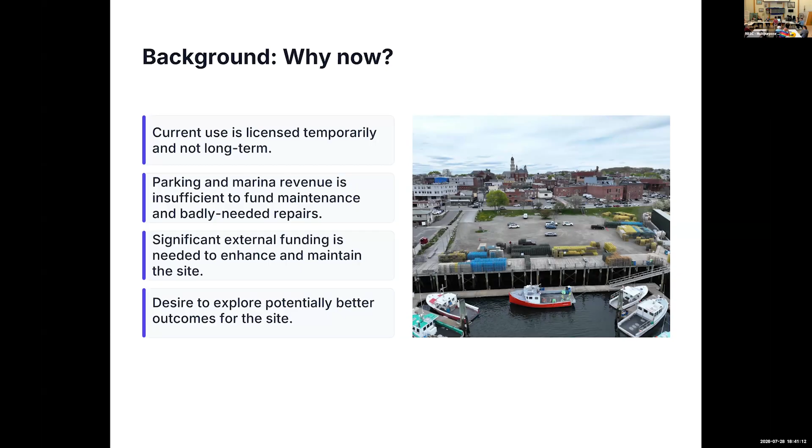So I'm going to update you on this refreshed visioning process and what we did. As many of you know, we received this technical assistance award from Mass Development, and we are partnered with Lori Zapalak, who's a consultant specializing in real estate, economic development, and maritime cities. She was a good fit for Gloucester. We had four main components of the work, and I'll provide a little bit more detail on each of them. First, we reviewed the site's history and especially previous visioning and development efforts.

Second, we wanted to clarify what was possible on the site, and this was largely in terms of the regulatory framework, so we looked at that in detail, and then we also considered other important contextual information, including the content of the technical studies I mentioned, looking at site conditions.

Thirdly, and this was the bulk of the work, we gathered community input through various channels. Earlier this month, we offered a public session reporting back on what we had heard. And then finally, we prepared for next steps.

Initially, the project was intended to produce a draft request for proposals document, but based on what we learned, we decided to do an intermediate step of an expression of interest process. So that's what we worked on.

So a little bit of background on the site. Based on its location in the heart of the harbor, it has a long history of being at the center of the commercial fishing industry and maritime trade.

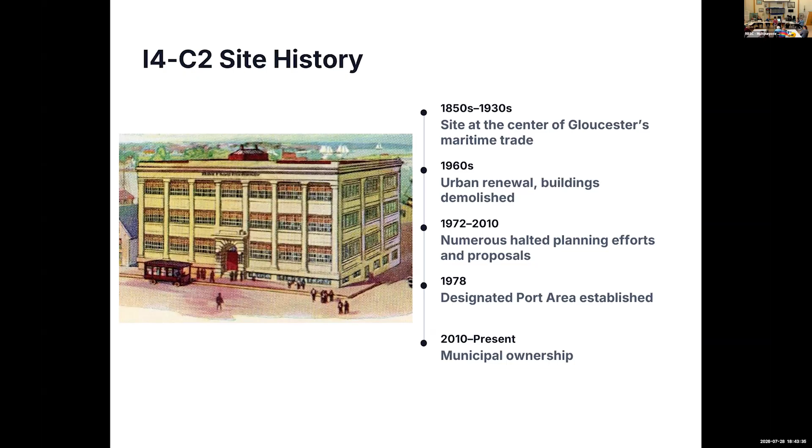And as I'm sure you know, in 2010, the city purchased this site with assistance from a Seaport Economic Council grant.

However, when the city subsequently launched an RFP, request for proposals process after that, they received no proposals in response.

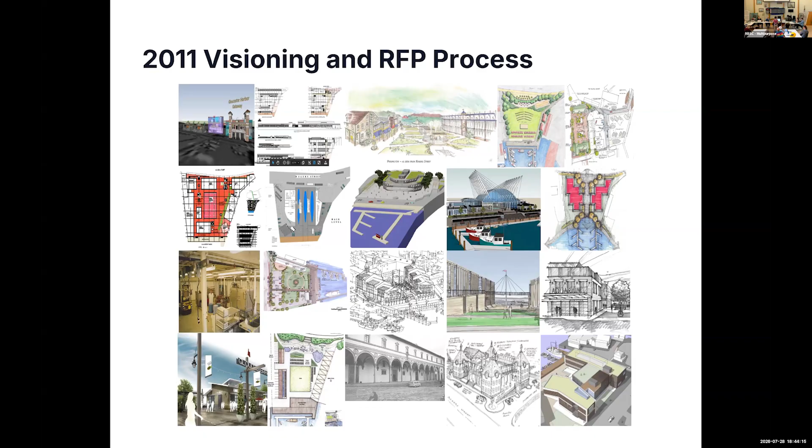So, a super light and incomplete primer on the DPA. Because this site is within the DPA, very strict regulations apply about how it can be used.

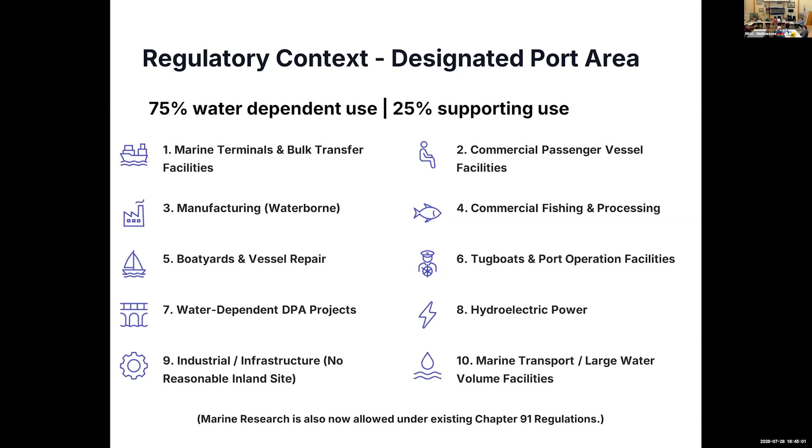And many of the concepts from the 2011 visioning process, though interesting, were not necessarily compliant with those regulations.

So with this most recent process, we wanted to gauge current public sentiment about the site because quite a bit of time has passed since that last round. But we also wanted to make sure and try to do a better job of grounding the input we received in the regulatory and financial realities of the site.

So we wanted to make sure people had an understanding of what could happen there before they flooded us with ideas. Our process ran for 3 months, from March through May.

So we did, I think, all the usual stuff. We created a web page with background information. We offered numerous ways to engage with the effort. So we had an online form. We had an on-site public engagement session.

We had 6 thematic focus groups that brought together people from different stakeholder groups relevant to the site, such as commercial fishing and seafood, commercial and community and neighborhood interests, and several others.

We made sure to speak to key stakeholders like waterfront property owners and site abutters. We also invited anyone else from the community who had strong feelings to contact us directly, and we met with quite a few of them.

And we advertised these through the usual channels, the city social media, the Gloucester Times, a project listserv that anyone could sign up for, and the webpage.

So we actually, although we had different types of input, we provided the same basic questions to everyone, and we prefaced everything with background information on the regulatory context.

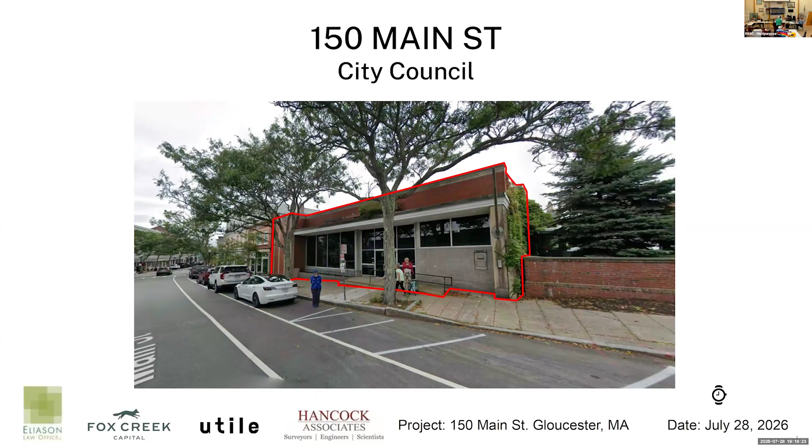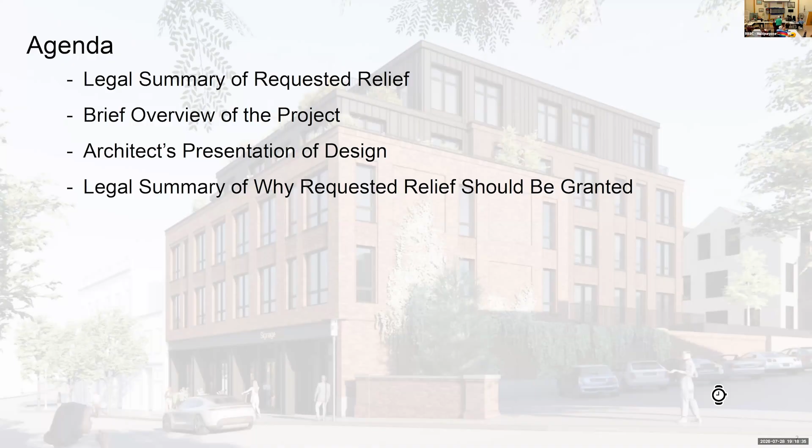The property is located at 150 Main Street, which is the former Santander Bank. Tonight, what we'd like to do is give you a legal summary of the requested relief, a brief overview of the project, the architect's presentation of the design, and a legal summary of why the requested relief should be granted. The applicant is converting the building presently permitted for a bank into a mixed residential and commercial space.

The bank has not been operational at this location for several years, leaving a hole in the fabric of both Main Street and Middle Street neighborhoods. The property sits in both the CB and the CCD district. The Main Street building is in CB, and the Middle Street building is in the CCD district. Also, approximately half of the lot, the Middle Street side, sits within the historic district. The Main Street portion does not.

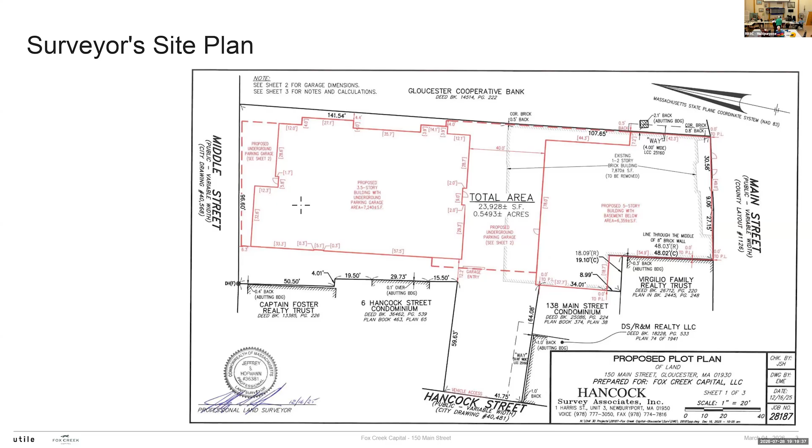As you may know, commercial uses in the CB and CCD zones have zero front, rear, and side yard setback requirements, and may be constructed lot line to lot line, and the bank was, in fact, constructed that way. Residential uses do have setbacks with a multiplier based on height, hence the need for variances from the ZBA for this project. The applicant has received all the relief it needs other than from the City Council.

On January 8th, 2026, the Zoning Board of Appeals voted unanimously to grant variances for lot width, front yard, side yard, portion of parking aisle width, and front yard vegetative cover on Main Street. Despite the complexities of this site, the project required only 5 variances. If this were a commercial site, none of the setback variances would have been required.

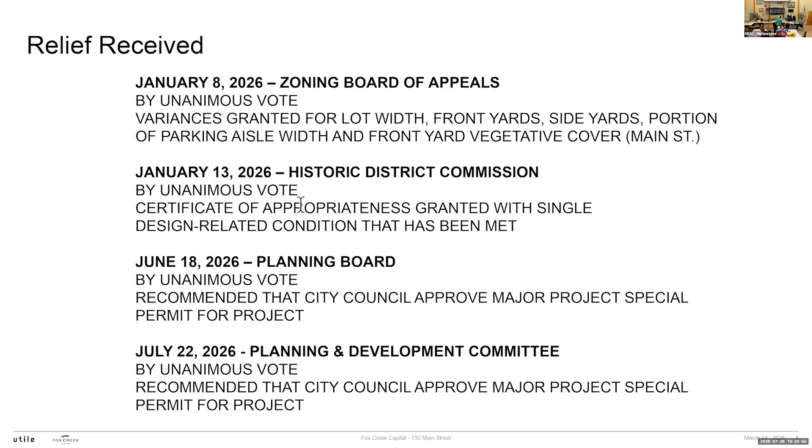On January 13th, the Historic District Commission voted unanimously to grant a certificate of appropriateness with one single design-related condition that has been met and incorporated into the plans filed with the City Council. On June 18th, the Planning Board, by unanimous vote, recommended that the City Council approve the major project special permit. And on July 22nd, 2026, the P&D Committee, by unanimous vote, recommended that the City Council approve the major project.

With the relief requested, there will be a special permit under GZO 2.3.1(8) for a multifamily with 40 units, special permit under GZO 5.7.1 for a major project with 61 bedrooms, special permit under 3.2.2 footnote A to reduce the lot area per dwelling and the open space per dwelling, and special permit under 3.1.6B for a building over 30 feet in height.

The project has been thoughtfully designed to fit into two distinct neighborhoods. It abuts both Main Street and Middle Street. Great consideration has been given to its residential and commercial abutters.

The applicant has reached out to the residential abutters, left a letter, given their contact information, met with several residential abutters to go over the plans and answer their questions. Also met with the Bank Gloucester representatives, which directly abuts the project, and other business owners along Main Street to explain the project. GMGI filed a letter of support with the city clerk.

Tom O'Grady of the Cut sent a letter of support to the councilors. Seti Robinson has also sent a letter of support on her own behalf and on behalf of Housing for All Gloucester. And the applicant spoke to the owners of Short and Main and received verbal support from them. The applicant intends to continue to maintain contact with both its residential and business neighbors throughout the process.

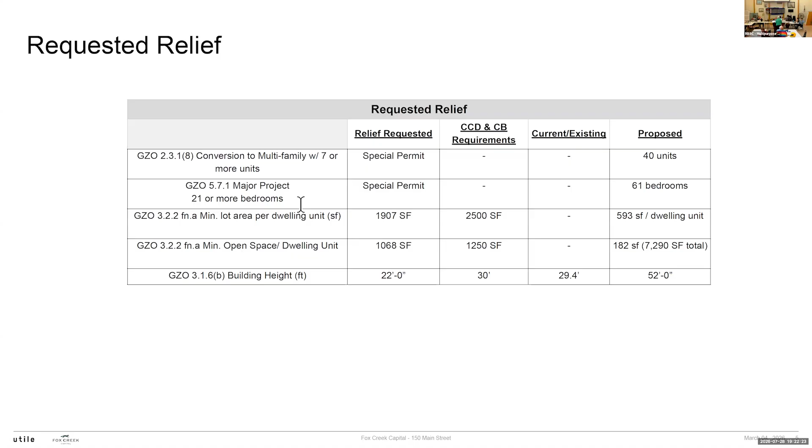And now I'd like to turn this over to Chris Boyce from Fox Creek to give you a general explanation of the project.

Thank you, Deb. Chris Boyce, 221 Woodside Ave of Winthrop. Good to see you all again this evening. I'm head of development for Fox Creek Capital.

And as hopefully you'll see tonight, designing with care, that really means that every decision we make focuses on creating a project that honors the community we're in. And that's what brought us to 150 Main Street. We started the design process with Utile over a year ago. And through the last 10 months, as Deb pointed out on her previous slide, we've gone through the public review process and had the opportunity to meet with neighbors, local business owners, city staff, Historic District Commission, the ZBA, the Planning Board, and many of you here on the council. We've been asked a lot of thoughtful questions from each of those groups throughout the process.

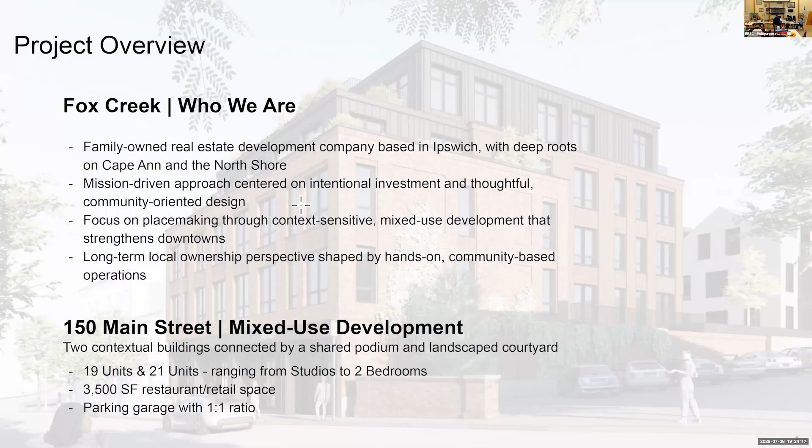This transforms an underutilized Main Street property into exactly the type of mixed-use housing that the city's comprehensive plan encourages. It adds year-round residents where infrastructure already exists. It strengthens downtown businesses. It reinforces the walkable character that makes Main Street special. Two thoughtfully scaled buildings with just 20 homes each may sound like a modest project, but together those 40 homes mean 40 new households living downtown.

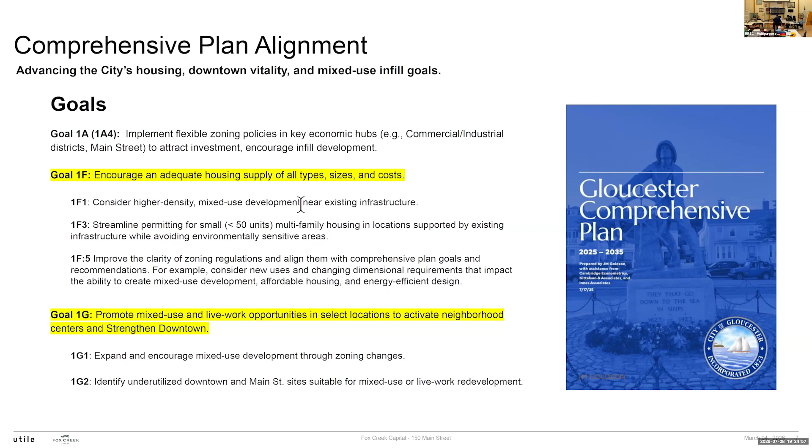Downtowns don't thrive just because of the buildings that occupy them. They thrive because people choose to live there. That's why housing is economic development. Those 40 households become new customers for Main Street businesses, new neighbors supporting local restaurants. They become more activity throughout the year from those year-round residents. They offer a stronger local tax base and more housing choices for people who want to call Gloucester home.

Of the 40 units, this project provides 10% inclusionary housing at 60% AMI. So it continues to offer new housing choices in Gloucester.

We've worked closely with Hancock Associates, Bowman Consulting, a large consulting team, and city staff to understand the project's overall impacts, utility impacts, but primarily transportation. Transportation is always a concern downtown, as is parking. This project provides all residential parking in an underground garage below the two buildings. The analysis from our parking and traffic study confirms this project fits comfortably into the capacity of the surrounding street network, while adding more people who can walk and support those local businesses.

Ultimately, this project is about taking a vacant site and creating something that contributes to Gloucester every day. Two buildings, twenty homes each, forty new homes in total—an underutilized site transformed into housing, ground floor retail, new investment, and a stronger Main Street. Those are the outcomes we anticipate this project will deliver.

But good projects are not just measured by what they contribute. As I stated earlier, they're also measured by how thoughtfully they're designed to fit into the fabric of their surroundings. With that, I want to turn it over to Michael LeBlanc from Utile, who'll show you how we worked to achieve those outcomes through thoughtful architecture, careful site planning, and a design that responds to the character of downtown Gloucester. Michael?

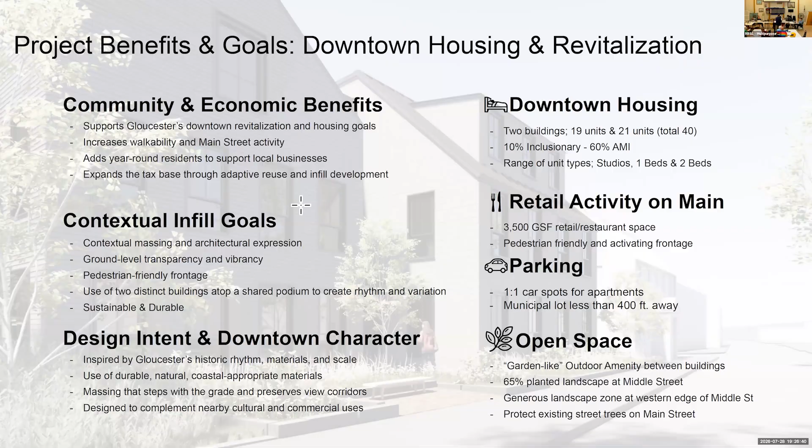Thank you, Chris. Michael LeBlanc of Utile Architecture and Planning. We are working with Fox Creek on the project, and hopefully you'll think the design we have here tonight is as thoughtful as Chris has been telling us it is.

So, starting with the existing conditions of the site. The current site is an underutilized lot with a vacant building and an unused parking lot, and in our opinion it's in need of infill development—all the benefits that come with that Chris just pointed out. To our east, we have the Gloucester Bank complex, which is actually a great neighbor for us. There's a laneway along the edge of our site, which gives a little breathing room for the project.

To our west is 75 Middle Street, 6 Hancock Street, and also the commercial buildings along Main Street. There's about 15 feet of grade change on the site between Main Street and Middle Street. This poses all kinds of challenges for us, but also gives us a great opportunity to tuck our parking underneath the building, as we'll talk more about as we go.

Because our site stretches all the way from Main Street— Five minutes, okay, we're gonna move then. Let's go quick. Thanks for the reminder. So we'll keep going here.

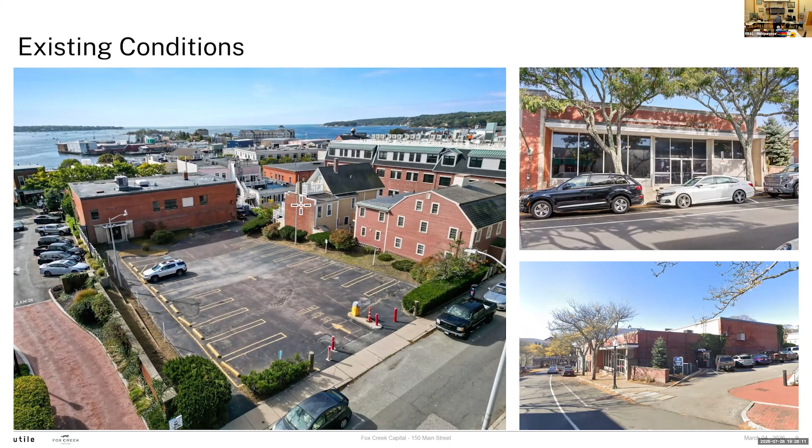So because we stretch from Main Street to Middle Street, we had to look at both contexts. We have the historic context of Middle Street. For us, there are many different scales, materials and types on Middle Street, but what we're most interested in is the residential scale, the materiality seen throughout the historic district, characterized by pitched roofs, wood clapboards, shingles, that sort of thing.

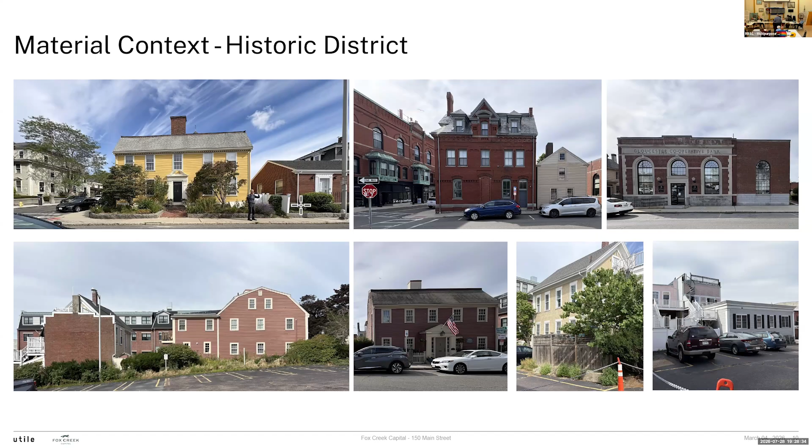Main Street is characterized by active ground floor uses built right up to the property lines, creating a well-defined pedestrian experience at the sidewalks. Over the storefronts, there are typically one or two, sometimes three additional stories that range in uses from commercial to residential. I would say that Main Street is the very definition of a pedestrian-friendly, active and vibrant street.

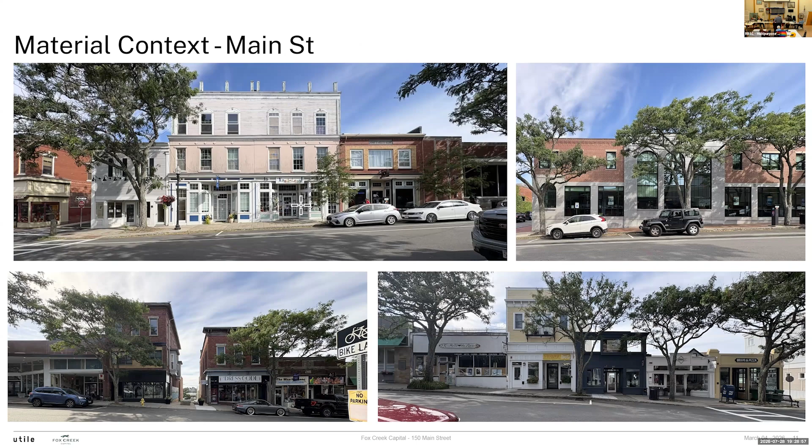We also looked at the uses along Main Street, and really what we recognize is that our project right now presents kind of a missing tooth in the vibrancy and activity of Main Street.

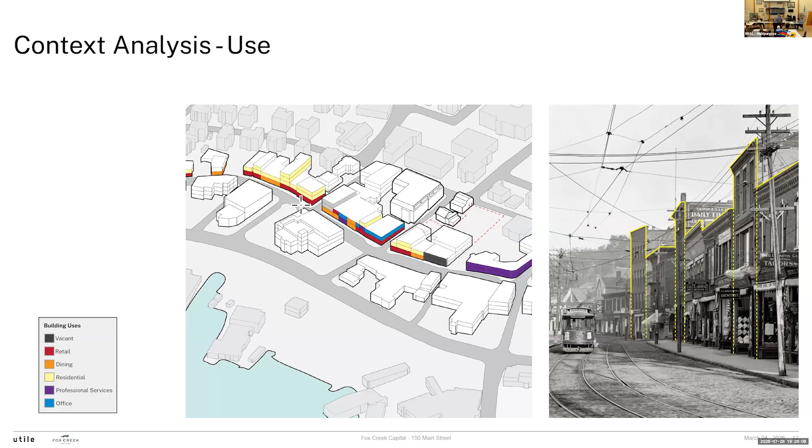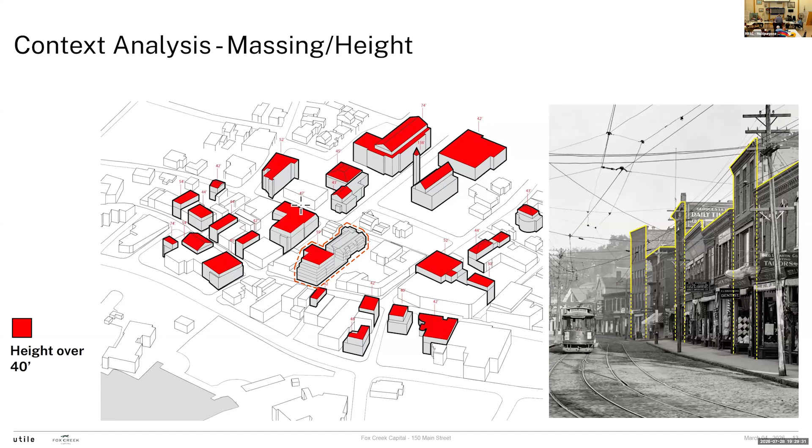We also looked a bit at some of the existing buildings. This is a diagram of all the buildings in the downtown area that are above 40 feet in height. And as you can see in this trace-over image on the right, one of the things we love about downtown Gloucester is the kind of variety embedded within all of the different parcels up and down, creating a really active and beautiful composition.

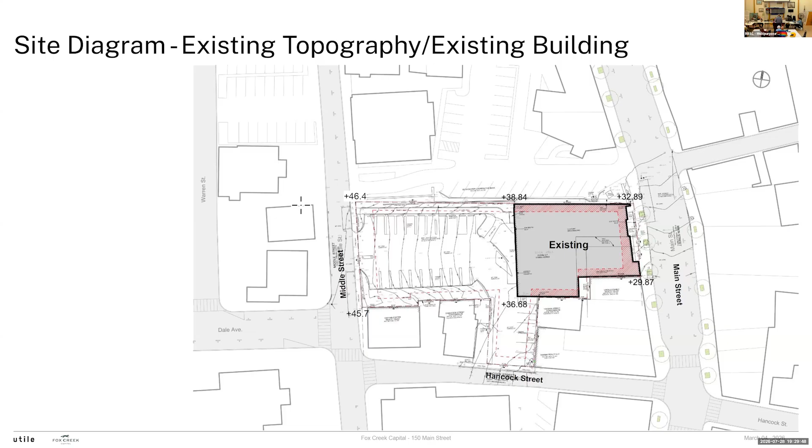So the existing site, as we talked about, stretches from Main on the right to Middle on the left, with 15 feet of grade change. We also have frontage on Hancock Street. You can see the existing bank building shown here. And as Chris and Deb had just pointed out, we are breaking our project up into two smaller buildings—21 units at Middle Street and 19 at Main Street—allowing us to bring parking vehicles in off of Hancock Street.

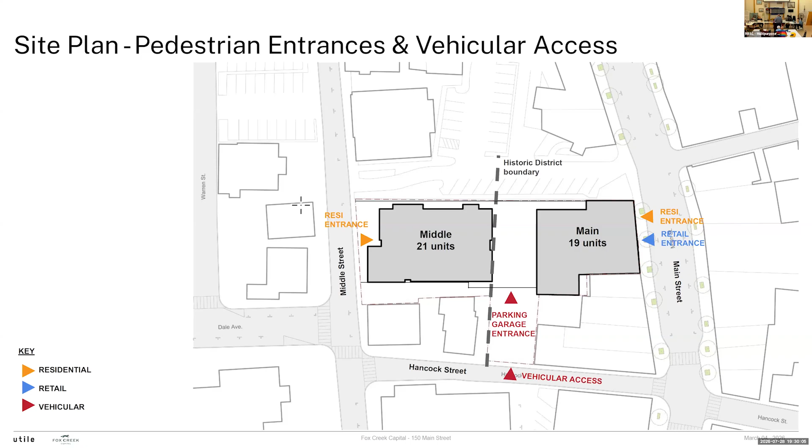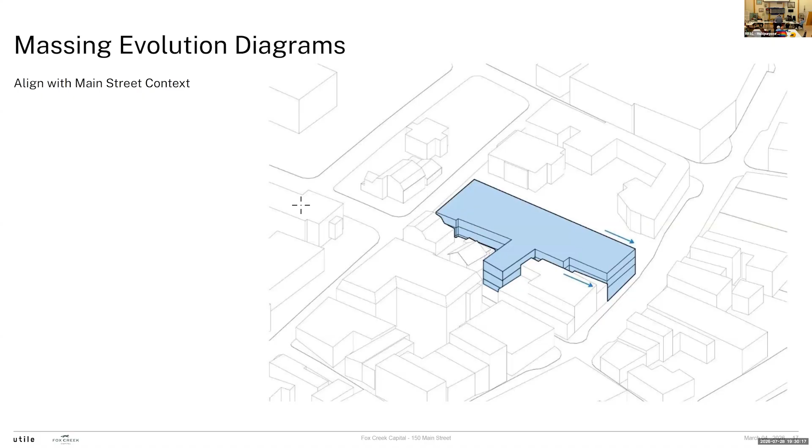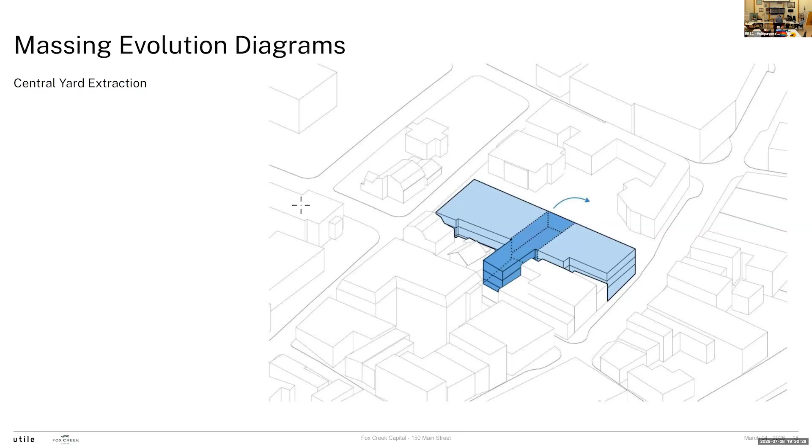So just a real quick evolution of how the massing started. If this represents the zoning envelope that could be permitted on the site for a residential use, we started by pushing the front of the building out to Main Street, which is consistent with all the storefronts. We then looked at the middle part of the block and decided it might be better for us to pull away from that part of the project, and reallocate some of that massing to the Main Street building.

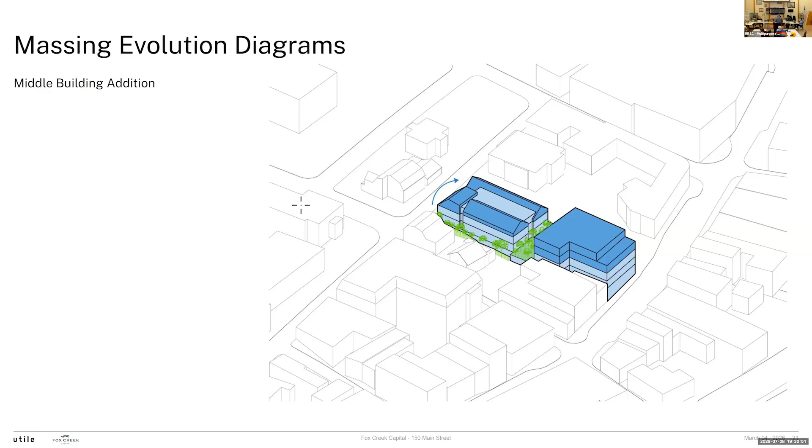We then looked at the part of our project between the Middle Street building and some of our neighbors along Hancock Street, and determined that by pushing our building a little to the east and adding that additional mass to the pitched roofs, we were coming up with a better solution.

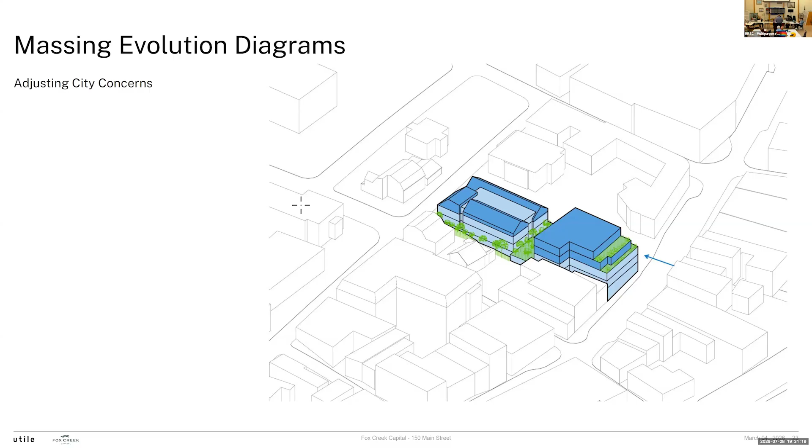We then looked at the front of the building. We had heard some conversations and comments from people at the city and neighbors that the front area on Main Street might use a little more sculpting to make it not feel so tall. So we did start to step back those front parts of Main Street in order to reduce any perception of height along that street. This is what I was referring to before.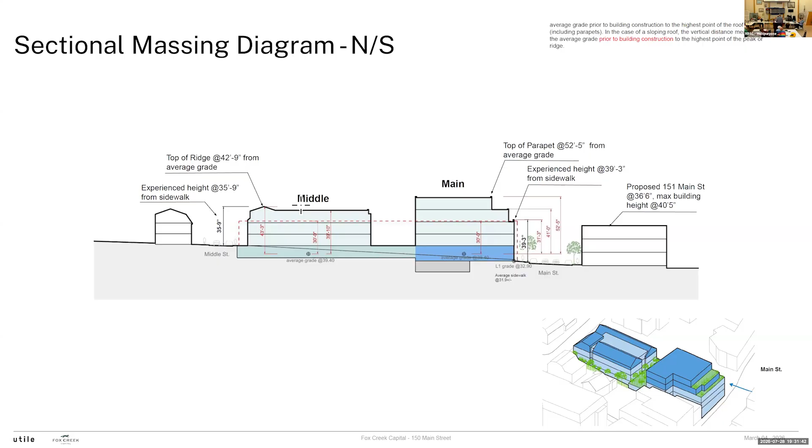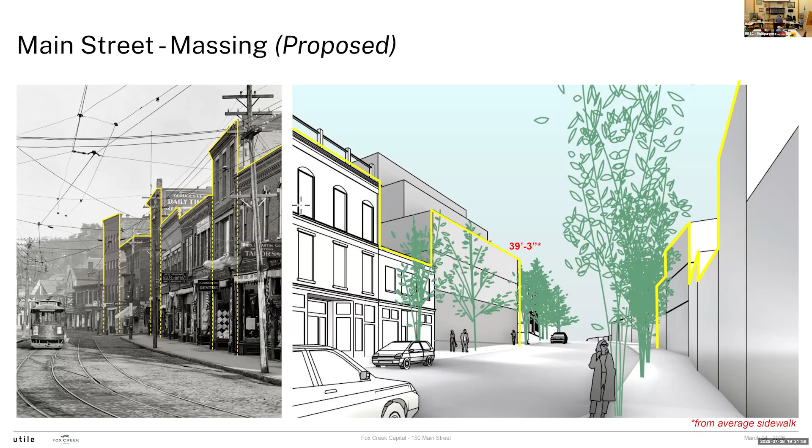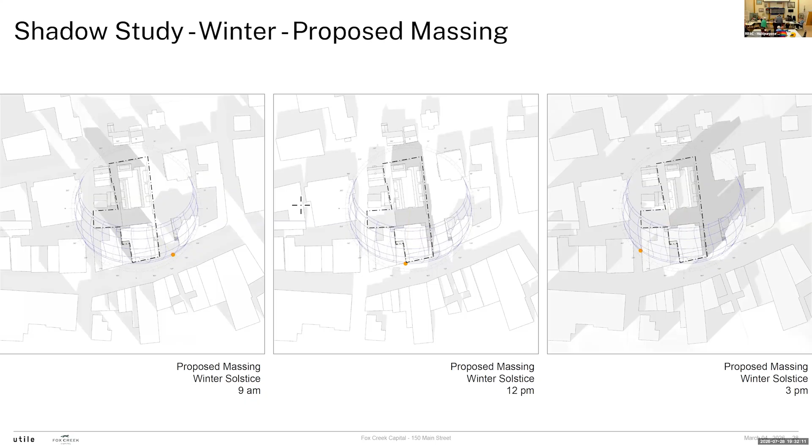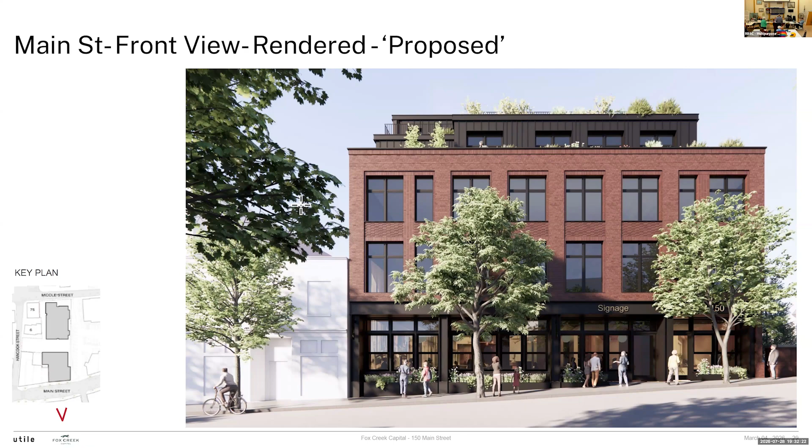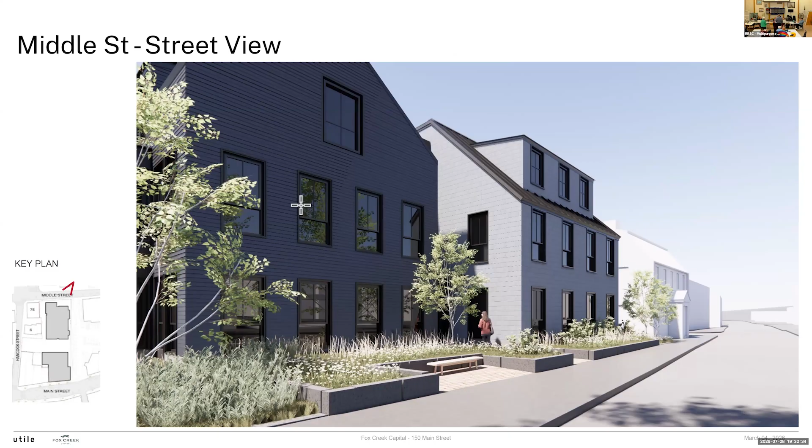Moving up to Middle Street, you can see how the building is articulated as though it's two smaller scaled buildings so that it's in scale with the historic district. Our roof lines and pitched roofs match neighboring buildings, with lush planting between our building and the neighbors. This is the approach into the parking, which has a reduced impact and presence from any of the public ways. This is off of Hancock Street.

We have questions, I'm sure a lot of this will come out. I understand, but if I can be allowed to articulate my point. We didn't need to get all the information about the company, they used their time, but effectively we have generally given latitude to applicants to explain difficult and comprehensive projects like this. I think adding a couple of minutes to allow them to summarize, or 5 minutes, and then giving any opposition the same would be certainly within our normal operating procedure.

A motion to extend it. I move that we allow the applicant an additional 5 minutes, and any opposition also 5 minutes, to explain their positions to completion. Second. Motion made by Councilor Gross, seconded by Councilor Benson.

Discussion. I think, and I just want to say for general knowledge - you come before us very often, Deb - you know it's a 15-minute timeline that people are given at the beginning of a public hearing, so I think we need to exercise that use of time as efficiently as possible. And I do understand that, Mr. Council President. The issue is, of course, with a major project requesting certain zoning relief, as the applicant we have a legal obligation to provide all of the information on the record, and we usually get to that through the question period later.

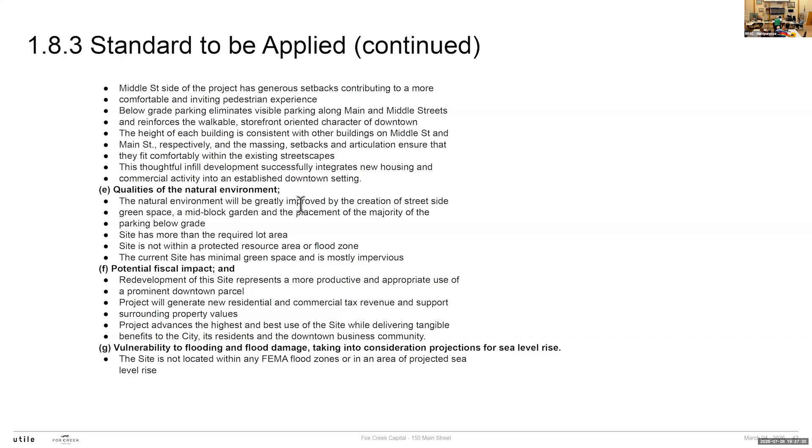Natural environment will be greatly improved, and it is not within any protected resource area or flood zone, and there's minimal green space, and it's mostly impervious. Fiscal impact will be more productive and appropriate use of the site. New residential and commercial tax revenue supports surrounding property values, advances the highest and best use of the site while delivering tangible benefits. It is not within any FEMA flood zones, et cetera.

Under 5.7.5, it meets the guidelines that the council must follow. All vehicular access is off of Hancock Street. Main Street and Middle will be pedestrian only. Site plan shows the required access points, drainage, and utilities serving the buildings.

Majority of parking is screened and below grade. Parking lighting will avoid glare on adjoining properties, robust landscape plan, and avoids major topographical alterations. All requirements of the zoning ordinance and building codes will be met.

Multifamily residential use in a non-residential district. This is a use that's entirely consistent with the downtown, balances mixed-use development with both residential and commercial functions.

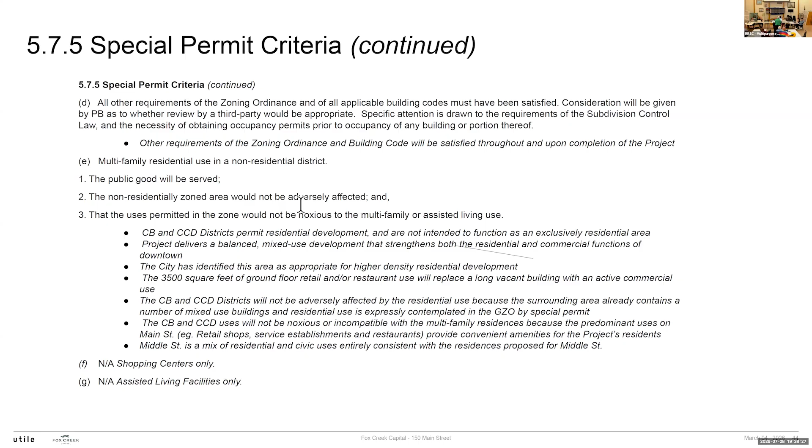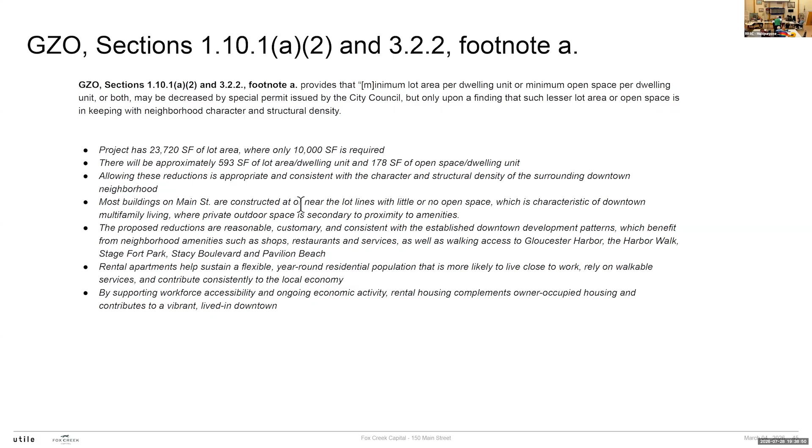With regard to 1.10.1A and 3.2.2A, with regard to minimum lot area per dwelling unit and minimum open space, when you have a downtown development, essentially the downtown is your backyard, and it provides your entertainment. It's within walking distance of many Gloucester amenities, such as the Harbor Walk, as well as the beaches.

And with regard to height, the building height in excess of 35 feet, such increase is consistent with the neighborhood character and would be substantially less detrimental to the neighborhood. Requested heights, deliberate, carefully calculated according to, as you saw in Mr. LeBlanc's presentation. The Main Street building measures 52 feet, but is experienced as a 3-story building, and Middle Street's entirely consistent with other buildings in that neighborhood.

The 2 distinct buildings, the heights distributed and articulated, creating visual relief and preserving light and air between the buildings. And therefore, we'd ask respectfully that you support this project, and we're happy to answer any questions that you may have. Thank you.

Anyone else would like to speak in favor?

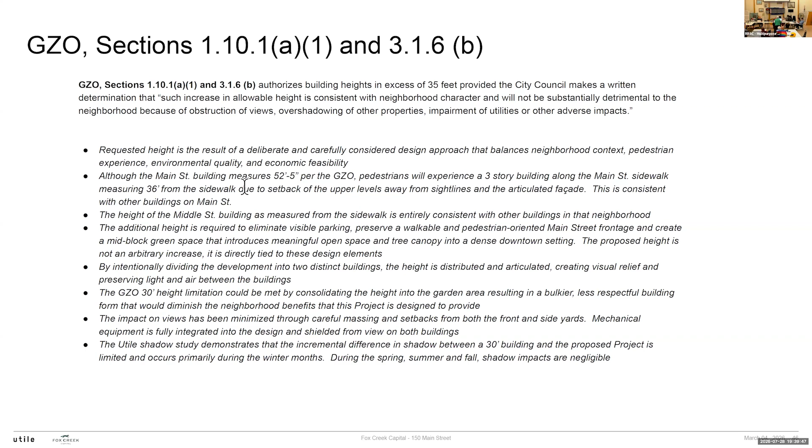Is this on? Yes. So I'm Sonny Robinson. I live at 20 Harvard Street. I'm speaking for myself as an individual as well as for Deanna Fay, and also on behalf of the housing advocacy organization Housing for All Gloucester.

In a word, we think this is a very good project. We believe it meets all of the criteria for a special permit from City Council, and we urge you to move it ahead tonight and approve it.

Looking at some of those criteria, I think the most important is to take a look at the social, economic, and community needs. This provides 40 more units of year-round housing in the downtown neighborhood. And 4 of those units, as they pointed out, are deed restricted affordable and wonderfully deed restricted voluntarily at the 60% level, which is certainly more in line with the actual income guidelines of Gloucester than 80%.

And while we certainly would love it if more than 4 units were in fact deed restricted in that way, we also recognize that we will never meet all the rental needs that we have in Gloucester until we have a sufficiently broad base of rental units, regardless of whether they are market or affordable.

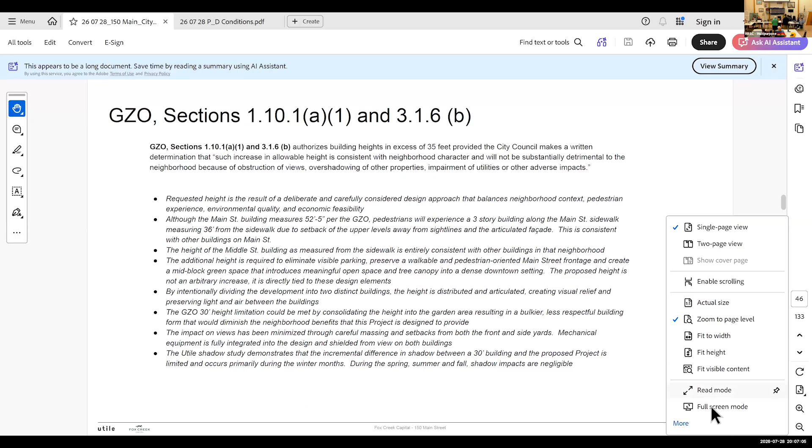Well, Deb brings it up, and I'll let Michael speak to this as our architect, but there's publicly accessible green space off Middle Street with a recessed bench for respite and real public engagement, where the Middle Street entrance also exists. There's terra firma green space, built on land extending from Middle Street all the way to our Hancock Street extension, planted throughout with new tree canopy, flowering and flora. And there's a green roof section between the two buildings above the parking, which brings light and air through that space and adds a canopy that doesn't otherwise exist downtown.

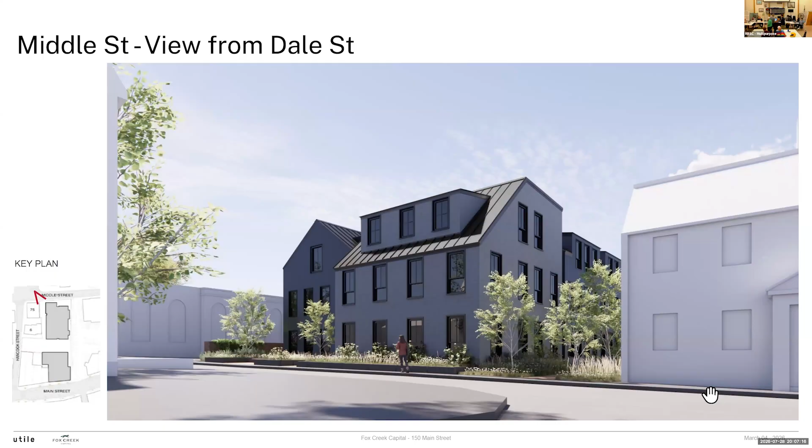Thanks, Chris. Yeah, it was right at the landscape portion where we had to shift over to more housekeeping issues. But we're looking closely at local precedents here. Right across the street at 90 Middle Street, there's a beautiful, quite historic landscape that we thought was really quite nice. Emulating instances and precedents like that around the project is something we've been very interested in doing.

We are prioritizing local tree species that require less water and less maintenance. We're not irrigating most of this, other than at the very beginning to get them off on the right foot. Some plants built on rooftops will need to be irrigated, of course, but the nature of the plantings is as you see here.

We'll quickly talk about the three main areas of landscape we're discussing. I also want to mention there are a couple of mature trees on Main Street that we're very interested in preserving. We're going to work with the DPW to start some early, slow pruning so we don't stress them out during construction, also amending the soil with supplemental nutrients for those.

On Main Street, the building is set back at that point, with two massings that set back differentially from Main Street. What we're doing there is trying to provide a place with a lot of green, trees, and a bench for people to sit as they're walking along the sidewalk. We're also aligning the front of our building with the front of 75 Main, just to the left of us. Because the street isn't quite parallel to the front of some of these buildings, that allows us to increase our landscape along the front.

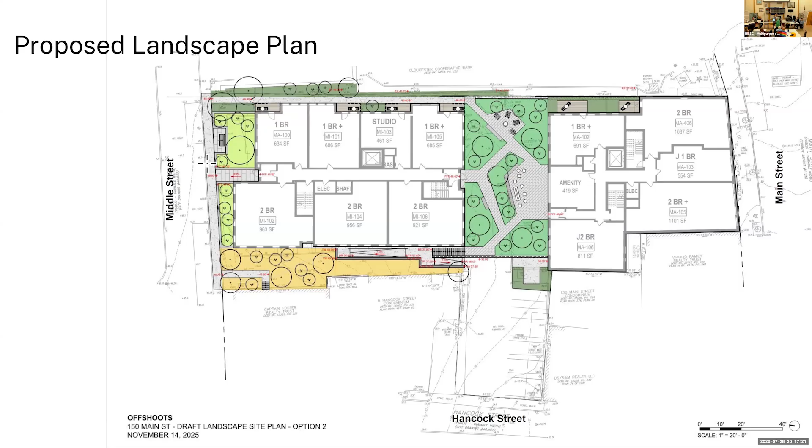Sure. First, I'll point out we went through a robust review with the Historic Commission on this. They voted unanimously that this was a very appropriate design for this area. But the basis of that was the massing of the building, the scaling of it, mitigating the larger building scale and making it feel more like the neighboring buildings. In terms of materials and moves: the dormers, the pitched roofs, the double hung windows, clapboards on our east building, shingles on our west building, differentiating those two things, and the detailing around those windows and how that's being treated.

We had a really long discussion about our 2-over-1 windows and all that. So those are the kinds of details we're proposing, and the Historic Commission was really quite happy with it—basically mirroring the type of design in the buildings around it, so there's a flow to it and it melds in with the landscape rather than sticking out as a brand new building.

Yeah, I think it's hard to perfectly emulate an older building these days. Yeah, and intentionally we are, let's say, interpreting all of the materiality and language that we see in many of the existing buildings. But I'd remind everyone that Middle Street has all kinds of buildings on it, many of which don't even come close to picking up on the residential scale of the district we're trying to achieve here. Yeah, that's fair.

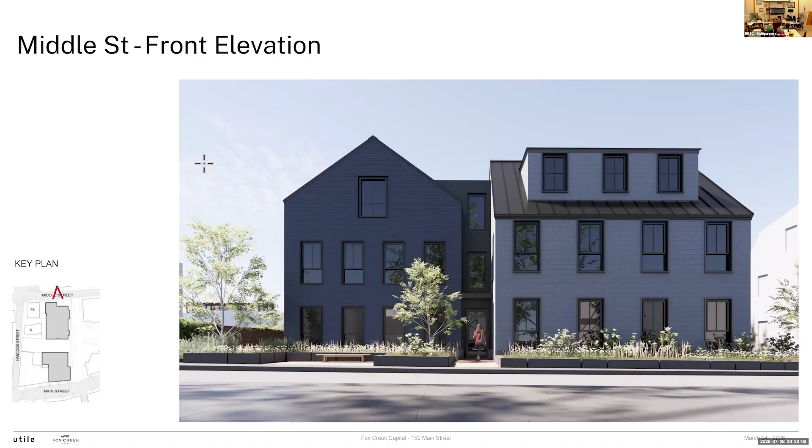Two, special permits pursuant to sections 1.8.3, 2.3.18, and 5.7.5 to allow the conversion to a new multifamily building with 7 or more units in a major project with 11 or more dwelling units pursuant to GZO 5.7.1 on the site located at 150 Main Street, on the basis that the requested special permits: one, will be in harmony with the general purpose and intent of the ordinance; two, will not adversely affect the neighborhood, the zoning district, or the city to such an extent as to outweigh the beneficial effects of said uses; three, meet the criteria necessary for the grant of a special permit.

That being: A, the social, economic, and community needs that will be served by the proposed uses; B, traffic flow and safety; C, adequacy of utilities and other public services; D, neighborhood character and social structure; E, qualities of the natural environment; F, potential fiscal impact; and G, vulnerability to flooding and flood damage, taking into consideration projections for sea level rise, and find that the requested major project special permit will meet the criteria set forth in GZO section 5.7.5A through E.

Three, a special permit pursuant to GZO sections 1.10.1A3 and 3.2.2, footnote A, to permit lesser minimum lot area and open space per dwelling unit, and find that the reduction of the required lot area per dwelling unit from 2,500 square feet per dwelling unit to 593 square feet per dwelling unit, and the reduction of the required open space per dwelling unit from 1,250 square feet per dwelling unit to 178 square feet per dwelling unit, is in keeping with neighborhood character and structural density of the neighborhood.